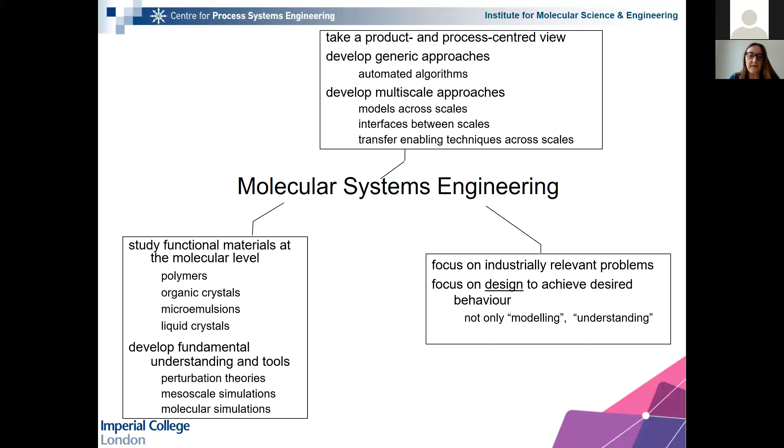So we want to go beyond understanding them and beyond modeling them to actually designing them and operating them better. And hopefully these themes will come through the talk.

So what I'm hoping to do this afternoon is to, first of all, convince you that we need to look at the molecular scale even when we're designing manufacturing processes. And Leah mentioned that this series is in the context of our work on greener plastics and generally more sustainable materials.

What I will be talking about here is the processes through which we make different materials. I won't be focusing specifically on plastics because that's a problem we haven't addressed yet, but the techniques that we've been developing for other manufacturing contexts...

For example, pharmaceuticals, should be applicable to plastics, and that's what we're hoping to find out through this new activity in greener plastics.

So one of the key tools that I will be using is computer-aided molecular and process design. That's quite a mouthful, so I'll use CAMPD for short. And I will first show you a property prediction platform which we have developed that helps us to connect to the molecular scale in a predictive way.

And then I will show you some examples of these different integrated molecular and process design problems, just to try and illustrate both some of the benefits of taking an integrated approach, as well as some of the research challenges.

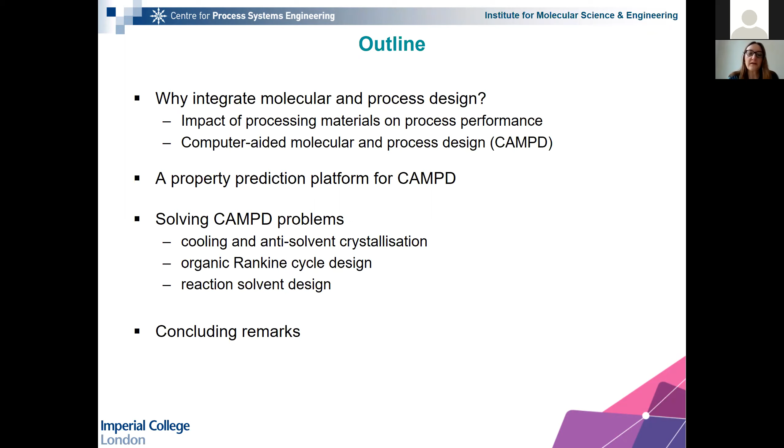And we look at a number of different things. So we look at crystallization, we look at waste heat recovery through organic Rankine cycles, and we look at solving or making reactions better through solvent design, and then end with some conclusions.

So why is it important to integrate the details of the molecular scale with the much larger scale of a process like a distillation column or reactor and so on? You have to remember that when we develop a manufacturing process, what we're trying to do is to make a particular product of a certain quality.

And we're trying to do that while doing it safely, while minimizing the environmental impact of that manufacturing process, and also while minimizing the cost of manufacturing, which comes both from our capital investment cost as well as our operating costs, so things like energy costs, for example.

And of course, energy - if we can reduce the amount of energy we're using, that has both environmental benefits as well as economic benefits. So let me try and explain in the context of solvents, which is an area we've worked a lot on, why this is important.

So you use solvents in many ways in manufacturing processes, and you use them, for example, for crystallization, so to separate your valuable product from the rest of what comes out of the reactor and obtain a nice pure crystal.

So paracetamol, for example, is a product that you consume in crystalline form.

And you might dissolve paracetamol in acetone, which is pure acetone here. It's fairly soluble in acetone, or in water, and it's hardly soluble in water.

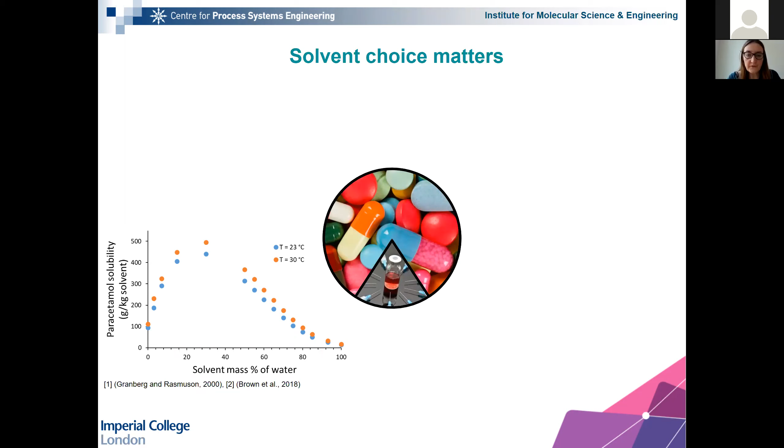Solvents are used widely in making pharmaceuticals, and so that comes with a lot of implications. The choice of solvent, of course, impacts the process performance, but it also impacts the way that your crystal looks. For example, you can get needles in certain solvents, and those can then be difficult to process further and to turn into the product that you really want. So that can be a limitation.

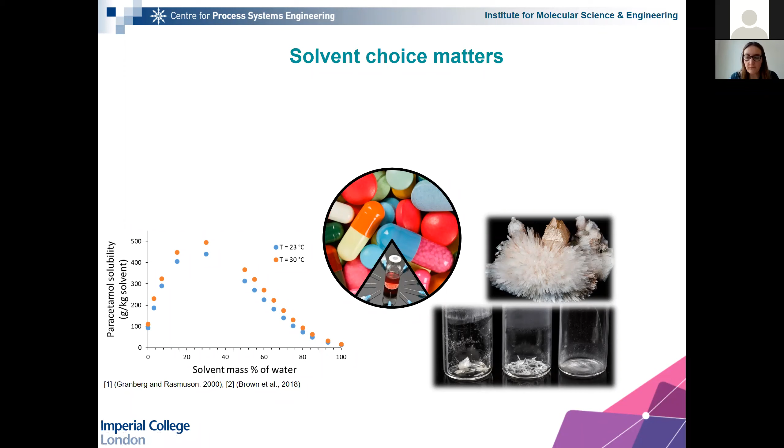And of course, solvents can pose safety risks. In the pharmaceutical industry, solvents have been found to be responsible for 50% of greenhouse gas emissions in the industry, through the cost of solvent recovery, for example, and solvent disposal. So it's really a major environmental impact. And as I've said, they impact on equipment, impact on other properties like the viscosity, and therefore how easy or difficult it is to get your fluids around the process.

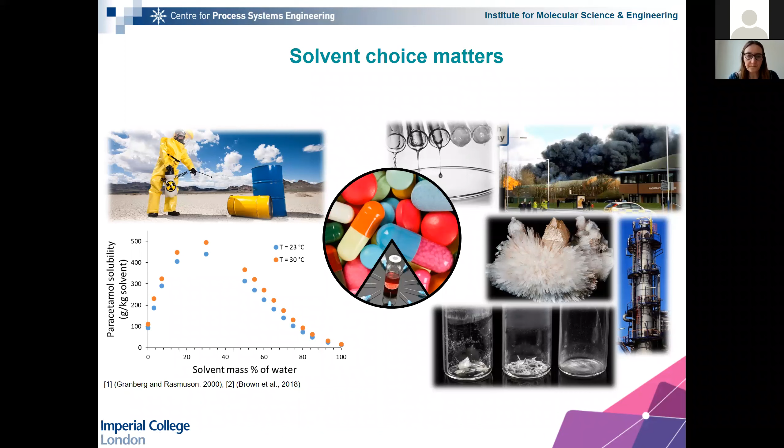So choosing a solvent, you need to address all of these aspects to find the best solvent for your process. There is no such thing as a good solvent on its own - it depends on how you're using it in context. So how might you go about this? Well, one fairly obvious way is to try and look at the properties of the solvent and to try and identify the properties that really matter for the performance, because that's reasonably intuitive and you can derive this from physical insight.

So if I look at the example I've got here, which is carbon dioxide capture by chemisorption, I'm looking for a solvent that is going to be absorbing carbon dioxide preferentially, so it's going to have a high affinity for carbon dioxide, so I can absorb it from a stream, for example, of natural gas, or perhaps a flue gas from a power station. That's really important, but I also need to then be able to separate the CO2 from the solvent. When I want high affinity, I also want the separation to be easy and to have low energy. So there's a big trade-off here.

And I can see that the properties that matter for this include things like the molar volume, the vapor pressure, the heat capacity. So what I've done here is I've got a number of putative solvents - these are just code names for these possible solvents. And I'm comparing them to monoethanolamine, which is a standard solvent for CO2 capture. When you see a red bar, it means the solvent is worse than monoethanolamine, and if you see a blue bar, then it is better than monoethanolamine.

So for example, surface tension here, when the solvent is better, it means that I may need a smaller column to effect the separation, which is good, less capital cost. On the right here, I've got other metrics, and these are environmental, health and safety metrics. You can see all of these solvents do better than monoethanolamine from this perspective - this is the cumulative energy demand, this is the global warming potential, you see mixed performance, and this is an eco indicator. So you can see that it's not very clear, the picture that emerges from looking at the properties.

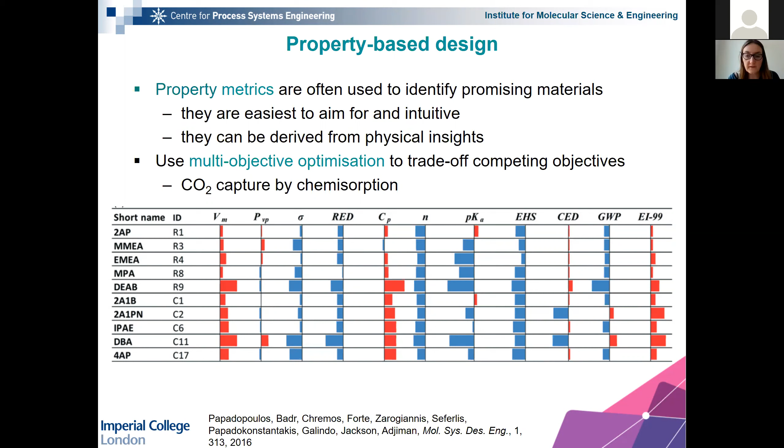And the reason that is, is because the properties are not the end of the story. They don't really tell me about overall process performance. I don't know from these whether I'm going to need a very large distillation column or I'm going to have very high energy demand and so on. I need to be able to quantify this, and I can only quantify this if I move to a process model and I really look at the use of the solvent beyond the properties in the process. So this is where the role of integration comes in.

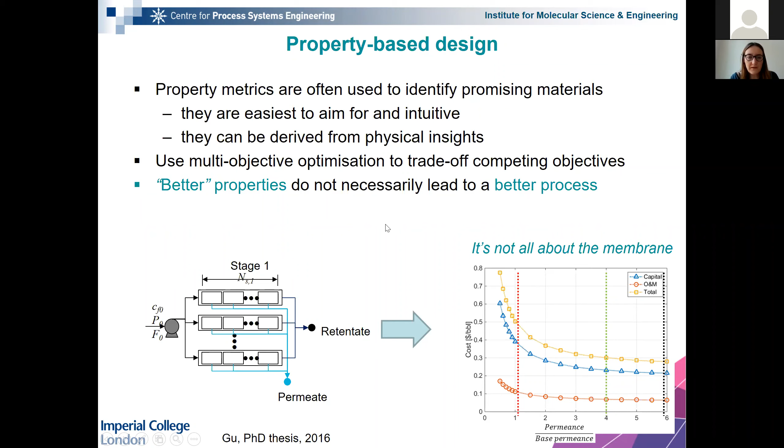There are other bottlenecks in the process that can then help you reduce the cost. So you might look, for example, at the details of the fluid flow over the membrane to remove the concentration gradients that are causing the performance not to improve so much here. So yes, up to a point we should improve the properties, but at some point it's wasted effort, essentially. We really need to look at the whole process to understand when properties matter.

So what we want to do is develop tools that help us make molecular level decisions an integral part of process synthesis and design. And there are a number of research challenges if we want to do this. This is my summary of what those are.

First of all, you need to have meaningful metrics that you can quantify. As I've said, properties are useful up to a point only, and we often need to try and find something more meaningful than that.

You need to deal with the complexity of looking for molecules that are going to work in your process. For example, if you find a solvent which happens to be actually a gas at the process conditions, then that's not going to work as a solvent at all. Or indeed, if it's a solid, it's not going to work as a solvent. So you need methods that are adaptive enough to recognize what will work and what will not work, and this is quite challenging from a numerical and algorithmic perspective.

You need to have prediction methods, property prediction methods, that help you assess how well a given molecule works for a given purpose. We need tools that are accurate enough and fast enough, efficient enough, to be used in the context of this integrated design. That is a challenge, to make sure we can predict all of the properties we need. Often we don't have everything we need.

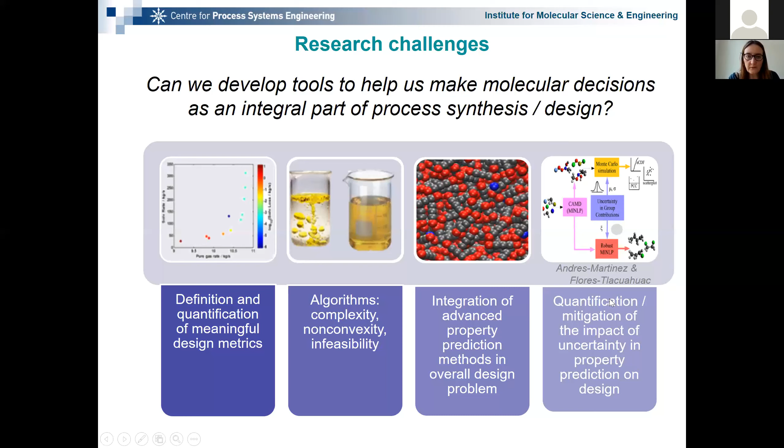Okay, so I'm going to show you a few equations here, really to give you a flavor for how we tackle these problems and how we translate what I've been talking about into a mathematical formulation, an optimization problem which is a mixed integer nonlinear problem. That's a standard kind of class of problems. So we have a bunch of equations and variables, and I'm just going to highlight the physical meaning of these.

So we have an objective function, which can be just one function or several functions. For example, it could be minimizing the total cost, it could be minimizing the environmental impact, it could be minimizing energy consumption, and we can have several of those.

We have some equations which capture our understanding of a physical system—process and property models. What happens if I make the temperature larger? What happens if I make the pressure lower? What happens if I change the solvent? How much will be our product flow rate? What will be the quality, the purity of the product, and so on? These are the equations that capture this understanding.

We have some inequality constraints, which are design constraints. They're, for example, the purity of the product, the maximum temperature that we want to use in the reactor, constraints that make sure our solvent is liquid at the operating conditions, so a bound on the melting point, or for example, on the viscosity of the solvent.

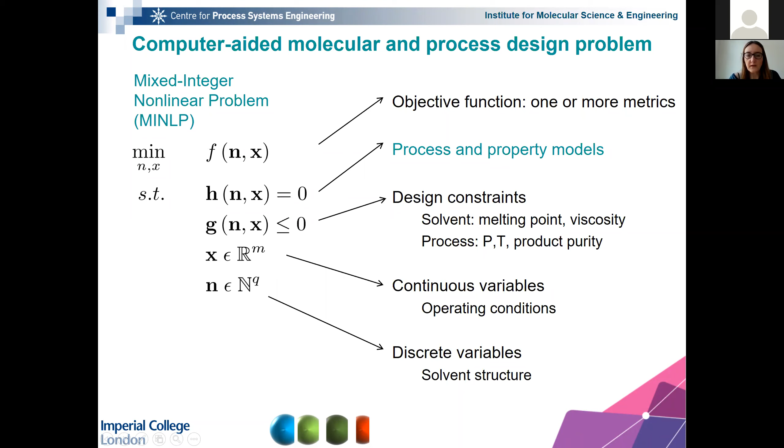So a couple of key messages when we talk about the property prediction platform. Our aim here is to predict the thermodynamics of mixtures and compounds for which no data have been measured, so that we can really innovate in terms of manufacturing processes and do better than what has been done traditionally.

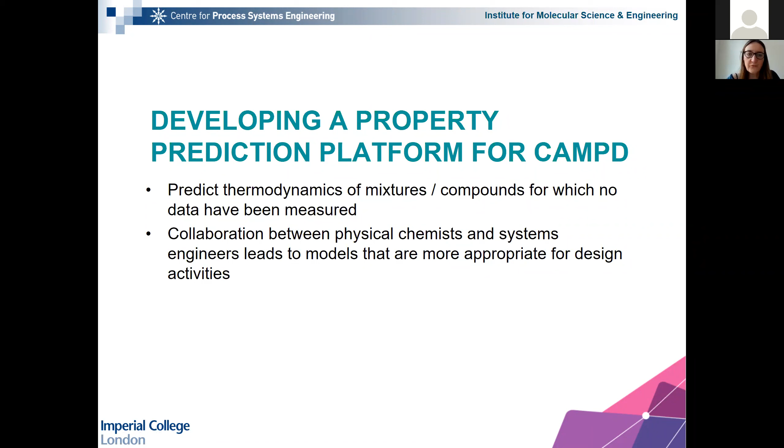The other key point is that achieving the kinds of predictive models that are useful for process and molecular design is not possible without collaboration between physical chemists who really understand the details of molecular interactions and engineers who understand why we need those models and what we need to do with them. That helps us focus on which properties are important and what kind of transferability we have. This is really one of the fundamental aspects of what IMSE as an institute is about, facilitating those collaborations so that we can have better tools to help us improve chemical and molecular systems.

So the model that we've been developing is an equation of state to predict thermodynamics of fluids. Its name is the SAFT VR square well equation of state, which was developed in the 90s to model systems such as polymers, where you can go from something like ethane all the way to polyethylene within the same framework, really taking into account the impact of that molecular aspect ratio.

The other thing is this equation of state is very good when you have a hydrogen bonding system, so you can add little sticky sites here and there to mean hydrogen bonding. It has the ability to model these kinds of behaviors well, while being essentially an analytical equation of state, so extremely fast to evaluate. That's very important if we want to evaluate many possibilities and different molecules.

What we've done through our collaboration is to make this approach more predictive. Initially, it was applicable to a single molecule or a family of molecules, a homologous series like the alkanes, for example. We've made it more predictive by breaking down those spheres into spheres that correspond to atom groups. So here I'm just saying CH3 and CH2, but you can have OH, COH, and so on and so forth. And we also went and tweaked the details of the theory.

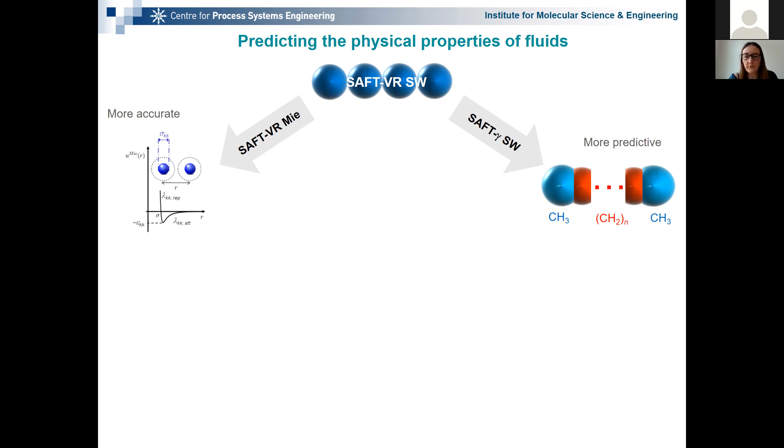Heat capacity is extremely important when you're doing process design, because this is what determines your energy cost. With the phase equilibria, you can know how much of the product you're getting, or how good your separation is, and what is the purity of your streams. And with the caloric properties, you can figure out your energy requirements. That combination is what enables you to do integrated design.

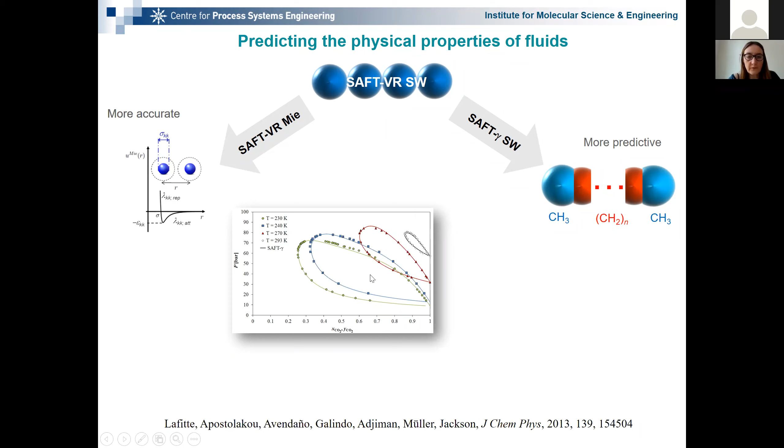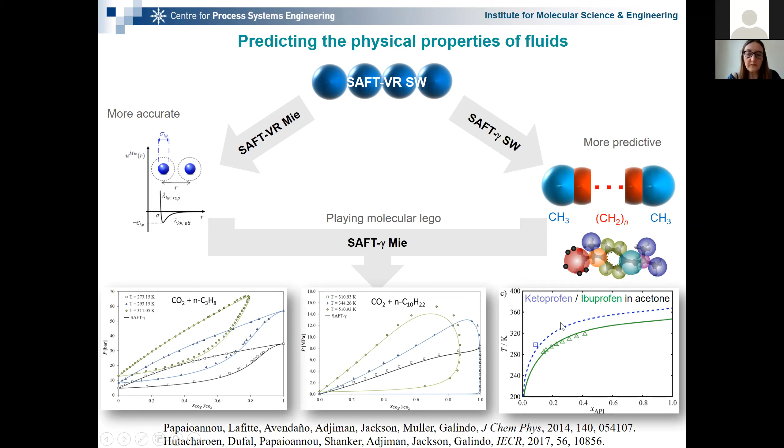You can use the same approach with a slightly larger number of groups to predict things like the solubility of ketoprofen or ibuprofen, shown here, in acetone or different solvents. So you're going from vapor-liquid equilibrium to solid-liquid equilibrium with completely different types of compounds, without using any of the solubility data. Over the years, we've been developing a matrix of group-group interactions - for example, CH2 with CH3 - and you have many different parameters that we can use to play this molecular Lego and predict the behavior of mixtures under different conditions of temperature, pressure, and composition.

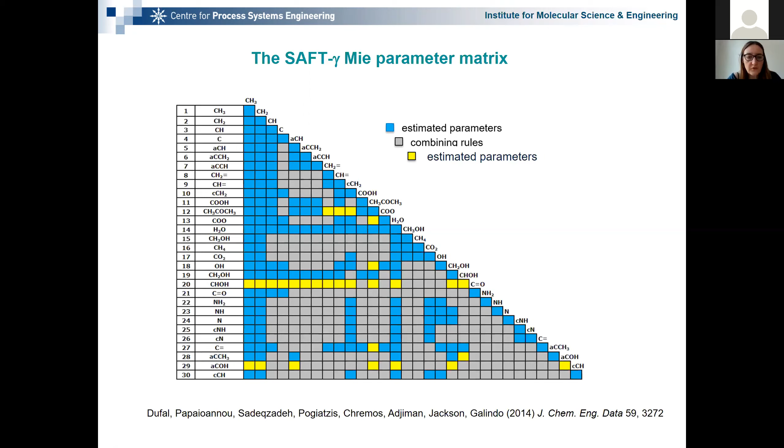So let me now show you how we can use this equation of state for computer-aided molecular and process design. I'm going to start by looking at the design of crystallization solvents. The key message from this application is that we have strong interactions between the solvent and process variables. This is what I was telling you at the beginning, and why we need to treat the problem in an integrated fashion - this will really illustrate this point.

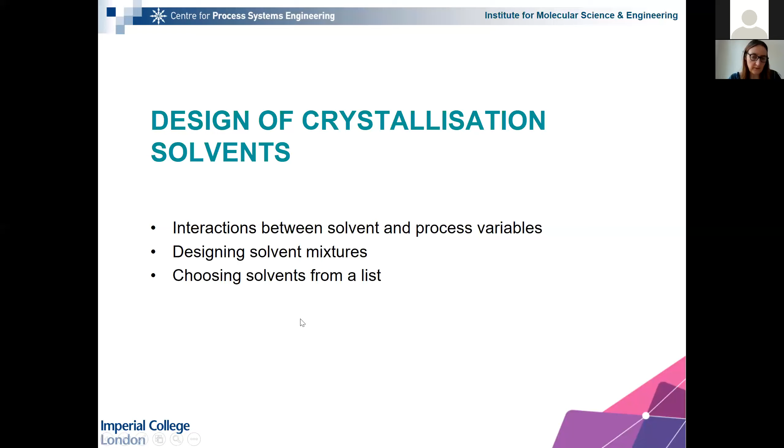We're going to be designing mixtures of solvents, which makes the space of possibilities much bigger, because we have to determine the composition of that solvent. We are not going to be creating new molecules here - we're just going to use solvents from a predefined list. I will come to the creation of new molecules a bit later.

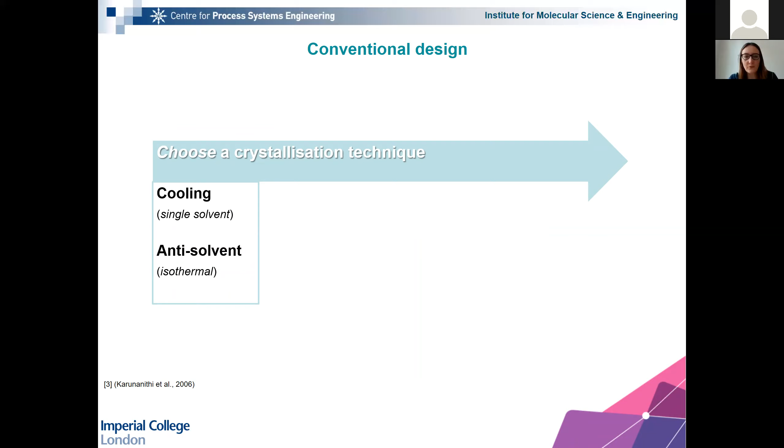So conventionally, how would you choose a solvent for a crystallization process? You would choose a crystallization technique - you might say, I'm going to run a cooling crystallization. So I have the product I want to crystallize dissolved in some solvent, and I'm going to drop the temperature and it will crystallize out. Something you know, for example, if you have a lot of sugar dissolved in a solution, and if you let it cool, some of it will crystallize out.

Or you might say, I'm going to use an anti-solvent crystallization. I'm going to keep the temperature constant, but add another component, an anti-solvent, to the mixture, to the crystallizer, and this will force my compound to drop out and crystallize.

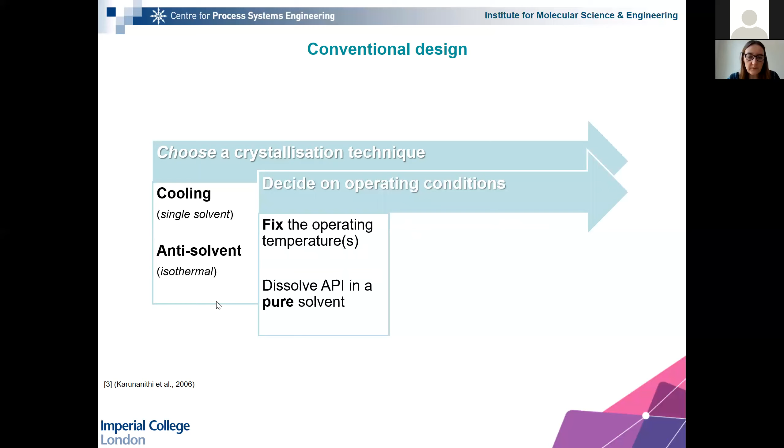Having done this, you would then decide on the operating conditions, so the operating temperature, and you would then dissolve your active pharmaceutical ingredient, the API, in a pure solvent. And then you would choose which pure solvent you have, doing things like finding a solvent or an anti-solvent by trying to optimize key performance indicators, for example the crystal yield or the solvent you use.

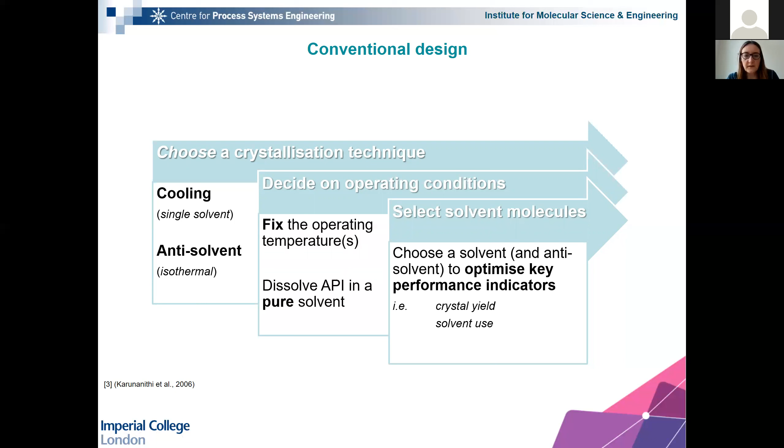So how much of the API you have in your solvent initially are you able to crystallize out? Because there will be some residual left in the solvent. And you might want, from an environmental and cost perspective, to minimize the amount of solvent that you use. Now, by doing this one decision at a time, you may find that you don't have a very high-performing process, and that you are limited in what crystal yield and solvent use you can achieve.

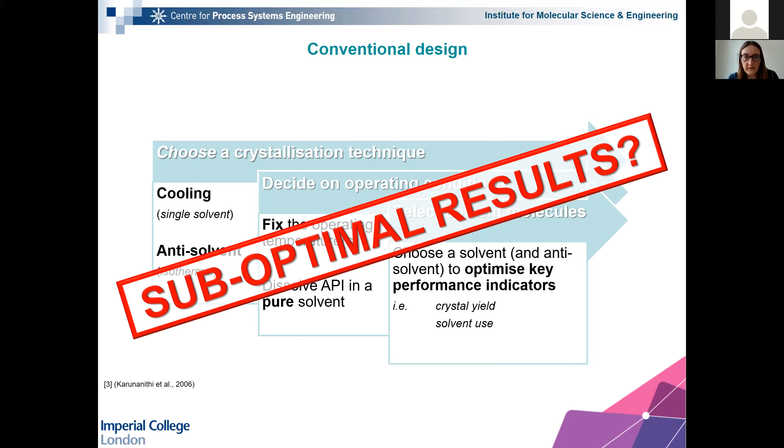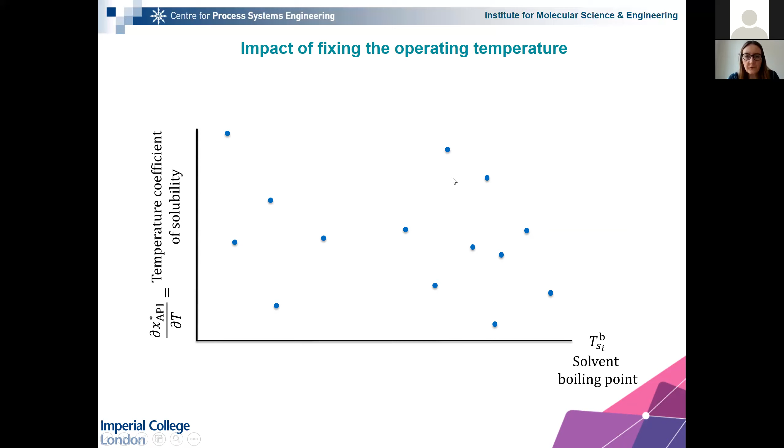So this quantity is plotted as a function of the solvent boiling point. These are different solvents, each dot is a different solvent, and you can see there isn't much correlation between the boiling point and this temperature coefficient. But if we fix the operating temperature, for example here, we're going to have a range of points that are not going to work for our process, and some points that are indeed feasible.

The solvent with the largest temperature coefficient, which is what we want for good crystallization, is this solvent here. But we won't be able to access this solvent or that one, so we have a missed opportunity because we've fixed the temperature. If we allow the temperature to vary, we open up the field of possibilities and can find our truly best operating temperature, which is the higher temperature here.

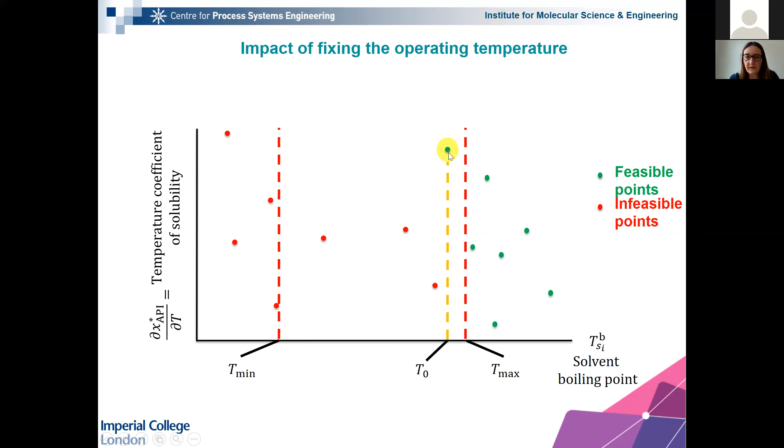So we do want to allow variation of the process conditions together with the solvent choices, the molecular decisions and the process decisions. We want to make several decisions simultaneously: at what temperature should we operate, which solvent molecule should we use, and what is the composition of the solvent? We've been developing a methodology to do this.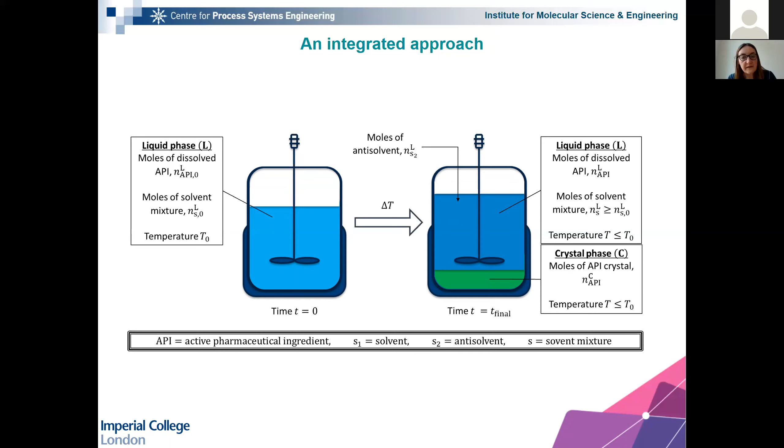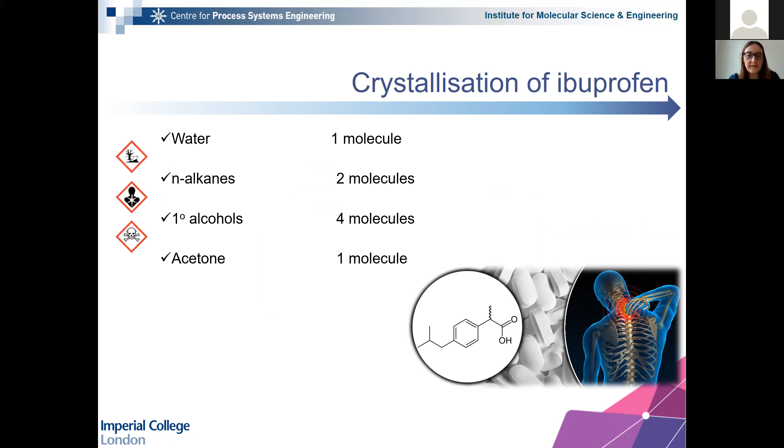Let me show you an example of this on the crystallization of ibuprofen, a well-known painkiller. We're using a small list of solvents: water, two different n-alkanes, four different alcohols, and acetone as our potential solvents. We're allowing binary mixtures of solvents, which gives us 28 possible combinations—a relatively small space to work with.

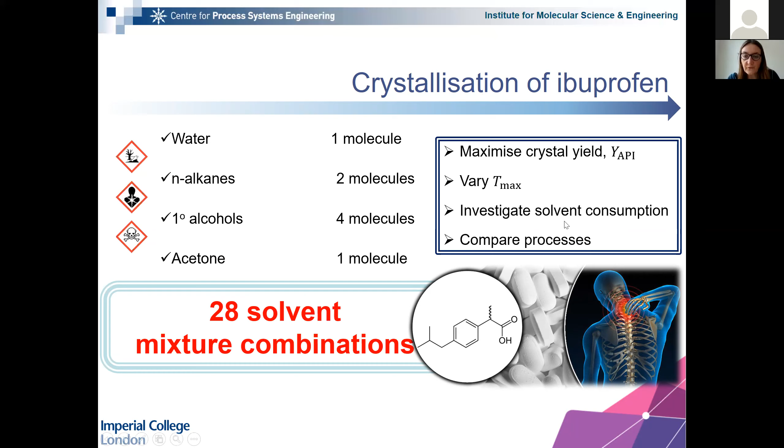We're trying to maximize the crystal yield in this case, allowing the maximum temperature at which we can start the crystallization to vary. We also want to look at solvent consumption, though that's not an objective here—we're just looking at how it evolves.

So here are some results. I'm showing on the left the crystal yield as a function of the initial temperature. If I fix the maximum temperature at 290, meaning I cannot have cooling—just anti-solvent crystallization—I end up with a mixture of acetone and water as my solvent, with quite a high yield. As I allow the initial temperature to increase, I can increase my yield quite a lot. If I go beyond this value, there's a switch in the optimal solvent mixture.

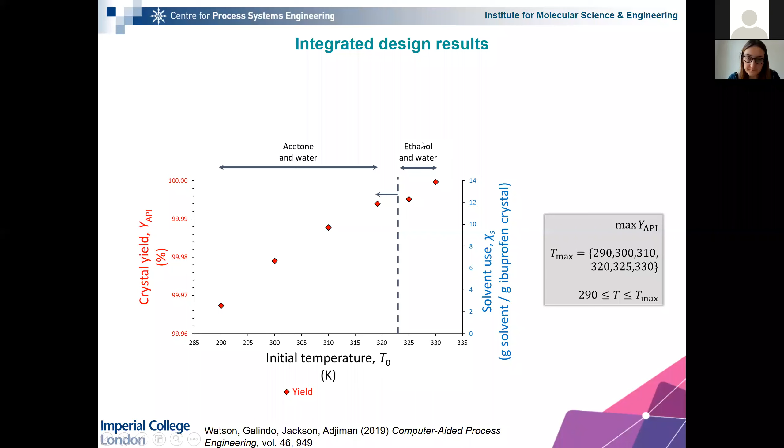So you can see the benefits of looking at molecular decisions and process decisions simultaneously. Out of this, I'm also getting the specific composition of the solvent—each of those diamonds corresponds to a different mixture of acetone and water.

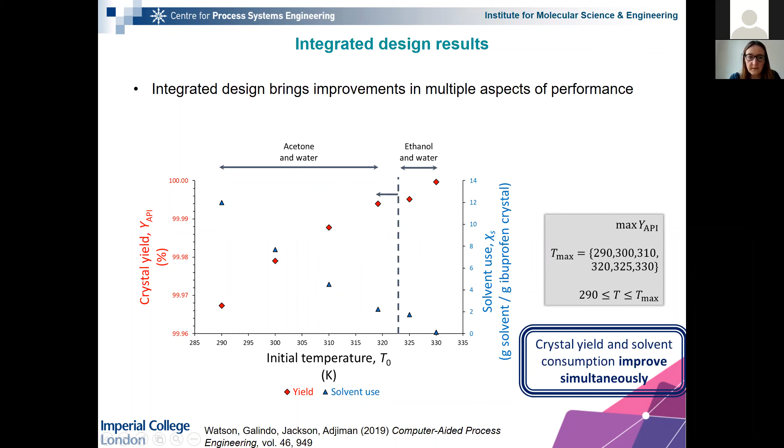So I'm looking at the components themselves and their proportions. Okay, so we illustrated a few of this example. I now want to move to a different example to look at some other aspects of computer-aided molecular and process design and how that can help to design better processes.

So I'm going to look at organic Rankine cycle fluids and the cycle itself. We're going to now explore a vast space of fluids. From the 28 possibilities we had before, we're going to be looking at 58,000, so rather a big increase in scope. And so the algorithms we use here become even more important. I'll touch very briefly on this, and I'll talk about choosing performance metrics as well.

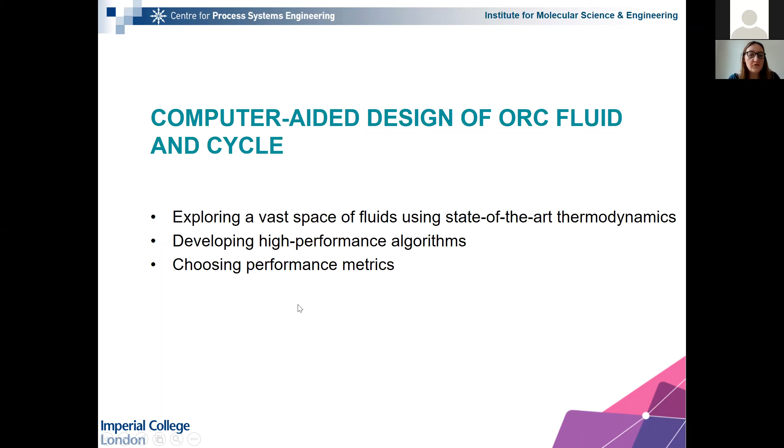So an organic Rankine cycle is a device through which we can recover low-grade heat. We have a waste heat stream, which is typically at a fairly low temperature, but which we'd still like to extract value from. So what we're going to do is add a bit of work to the system, and we want to recover additional work by recovering the energy in the waste heat stream. For this, we need a cycle, and we need a fluid to go around that cycle.

So we take this fluid from a liquid at a fairly low temperature. This is the temperature entropy diagram here, so we're somewhere down here. We're going to increase its pressure via a pump with the added work that we put in. We're then going to put this fluid in contact with our waste heat stream, and that's going to evaporate the fluid. Then we're going to recover the energy that the fluid has gained through a turbine, and that will give us the work output that we're looking for.

Okay, so we're trying to add as little work here as possible to recover as much work as we can, extracting heat from our fluid here. We're then going to take our vapor stream, that is now at a lower pressure, and we're going to put it in contact with a cold stream. And we're going to condense it back so it can go back around the cycle.

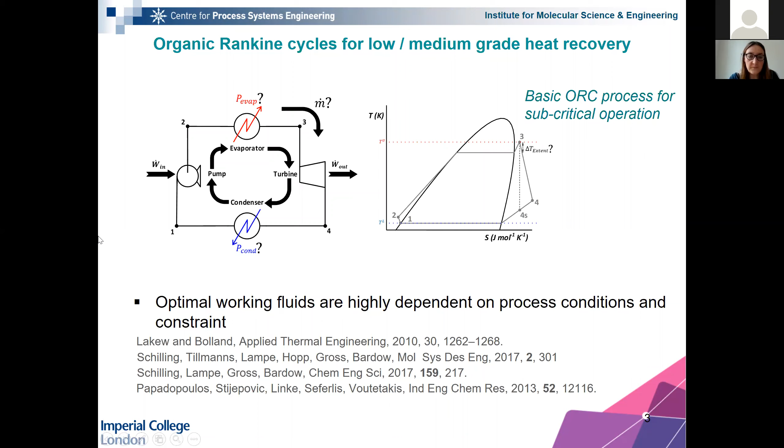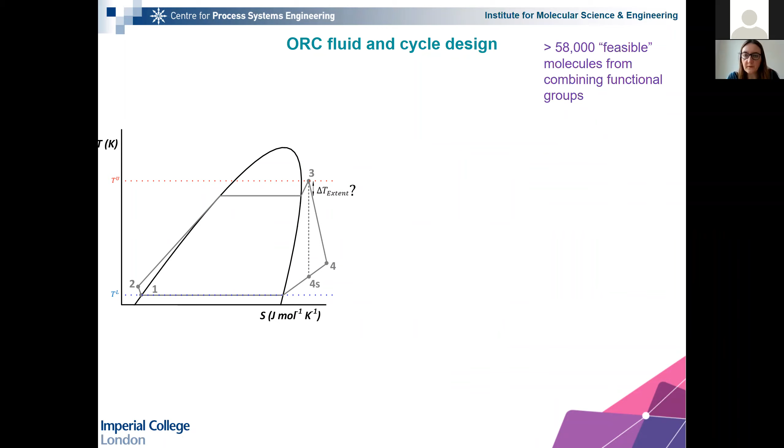So as you can imagine, the performance of the system is very much dependent on the properties of the fluid itself. So we're going to take a system of 58,000 possible molecules, and we're going to try and develop this from the functional groups, so the atom groups that I was mentioning before.

So we have here, for example, for a given cycle, we have the different temperatures. We have the lowest temperature at which we can operate, and we have here the medium or the highest temperature of our waste heat stream. And so we have to operate within this window here.

So if you look at different molecules from the set of 58,000 molecules, you can see that of these three, ethene, butane, and octane, only butane crosses the operating window. And this will depend very much on the system, the particular waste heat stream that we have at our disposal. So within the 58,000 molecules, which ones are feasible or infeasible will depend on the context.

So it turns out that over 99.5% of the molecules do not have the right properties. So actually, many of these 58,000 are wasted effort. But the set depends on the problem, so it changes all the time. So we can't reduce it a priori.

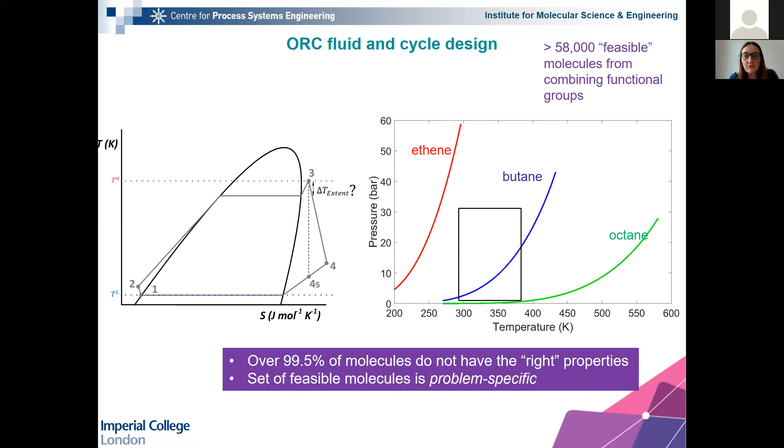So we're going to use an MINLP framework to address this problem. I don't want to go into a lot of detail here, I'd be happy to answer questions about this. But what I want to say is that, compared to a traditional algorithm, we've added a few tests and modifications to enable those molecules to be screened, to enable the infeasible molecules to be eliminated, and for the algorithm to succeed.

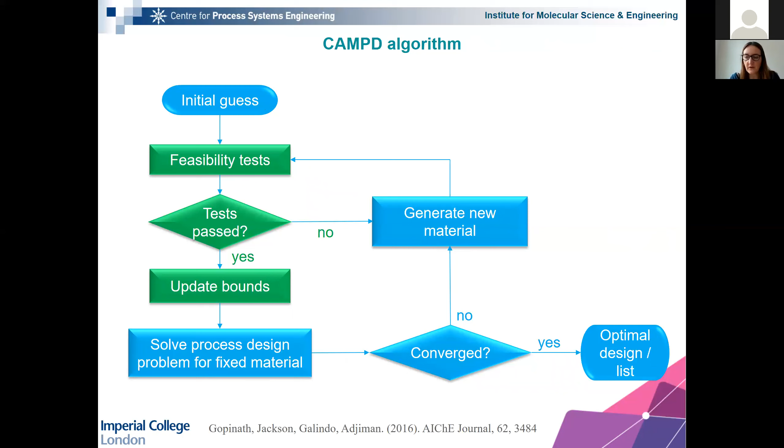And then the other thing to point out here, which I mentioned earlier, is that we are going to try different materials, but we're not going to try all 58,000 molecules. And that's really important because it really cuts down the cost. So let me show you some examples.

So we're using the equation of state that I showed you earlier, and we're using the MINLP framework. And here are a few case studies. So we're looking here at 3 different case studies where we have different waste heat streams. You can see our upper temperatures are different in all 3 cases, and the lower temperatures also vary.

You can see here that we have quite a wide range of temperatures, but in case study 3, we have a very narrow range of temperatures. And that is going to have an impact on what is feasible or not.

Finally, in this case here, we're looking at maximizing the net power output from the system. And in this case here, where we have solar collectors, we're looking at maximizing thermal efficiency as our objective. So, two different perspectives on these problems.

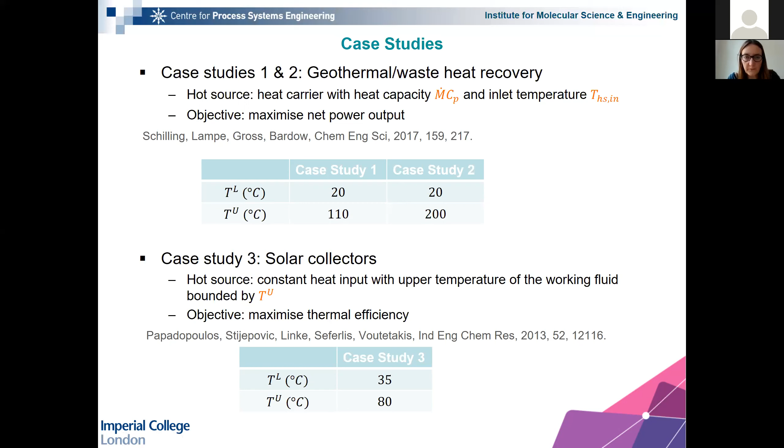So if we look at the space of feasible candidates for the three case studies, out of the nearly 59,000, you can see we have different numbers of feasible molecules. Case study 2, which has the widest temperature range, has 263. But case study 3, which has the narrowest range, has only 26.

The other thing you can see is if you look at performance versus the rank of a molecule in each of the cases, you can see different behavior. So in cases 1 and 2, where we're trying to maximize the net power output, we can see that really drops dramatically quite quickly from molecule to molecule. Okay, so these are all feasible molecules. In case study 3, the first 10 molecules also give us similar performance, and then we have a big drop in performance for the other molecules.

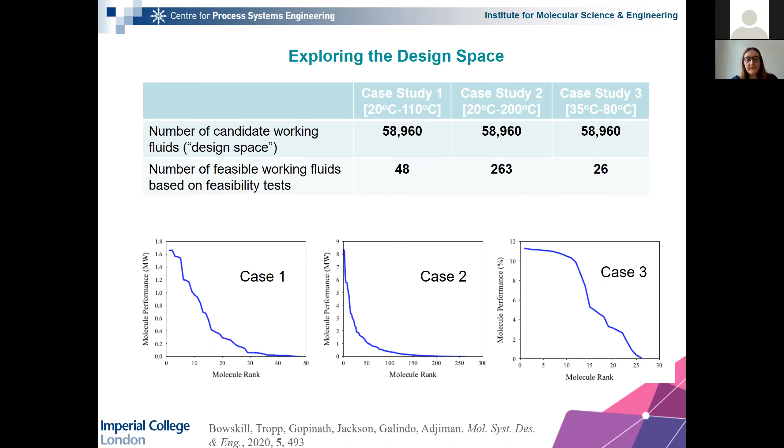The other interesting thing we learn with these case studies, in particular with case study 3 - these are the top 10 molecules here that we found - is that if you look at the properties of those molecules, you will see in the literature many examples where people say you need to find a molecule with low heat capacity, a specific molecular weight, or different behavior in terms of the critical pressure. Actually, the performance of the process from a thermal efficiency perspective is not so clearly related to these properties. So you really need to look at the process and not just at the properties.

And this is shown in this graph here. This shows you the deviation from average for the 26 feasible molecules of different properties - density, heat of vaporization, and so on. Each dot here represents a feasible molecule. The red ones are the top 10, so they're the really good performing ones, and the solid one is the top molecule. You can see that, for example, on the heat of vaporization, yes, they're all less than average, but actually the best one is pretty average in its behavior here. And there's a little blue dot you can maybe see here, which has the lowest latent heat of vaporization, but doesn't perform so well - it's not a high performer. So actually the solid one, the best one, is not exceptional in any way in its properties. It's pretty average. And that really tells us we need to distinguish between properties and molecules and processes.

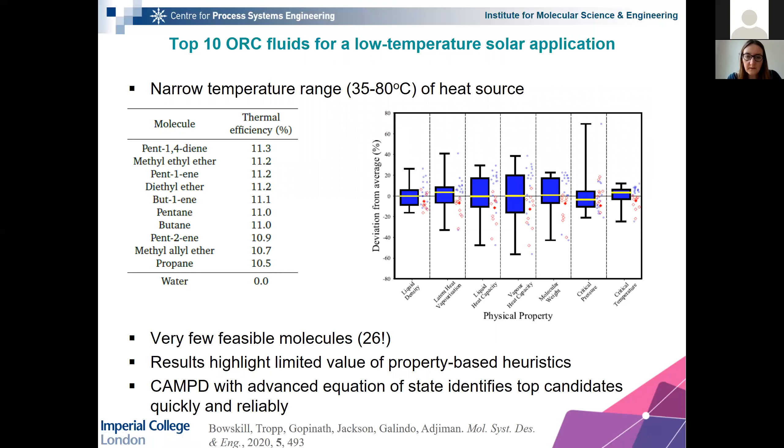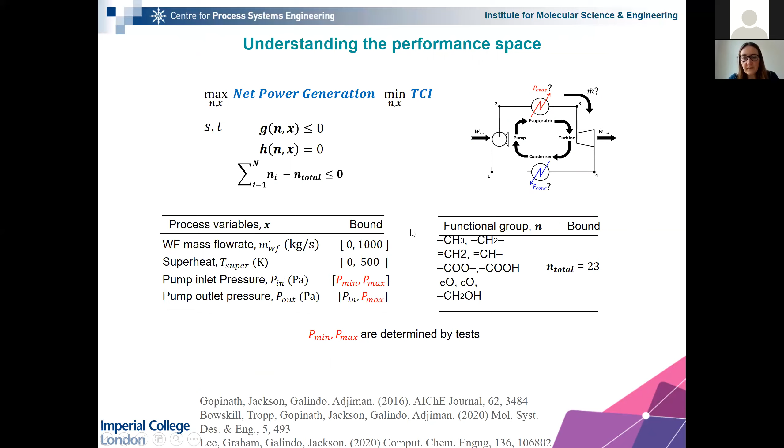The next thing I want to say about this type of ORC systems is that you can start looking at different objective functions. So if we look at net power generation as well as the total cost of investment - these are the details of the design, the groups we use to make our molecules - you can start developing algorithms that can solve this problem, where you're trying to be in this corner: the inverse of net power generation, and the cost. So you want minimum cost and maximum power generation - you want to be here.

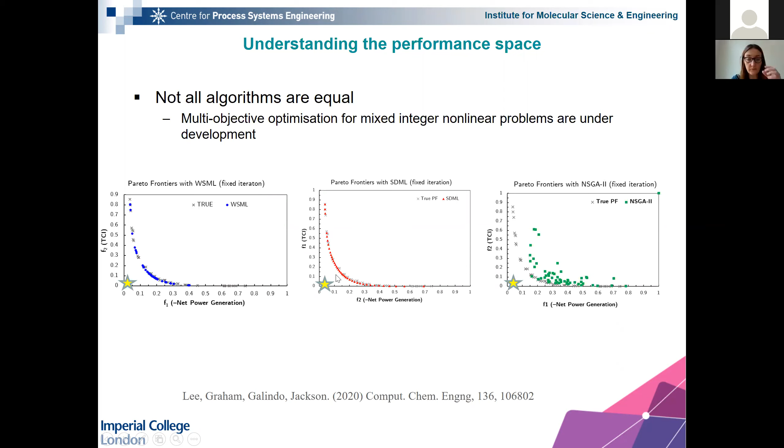And this shows you what you can achieve here. All those red dots, the diamonds, represent the best you can achieve. So we're developing algorithms that enable you to find these trade-off solutions, and then you can choose where you actually want to operate as a designer.

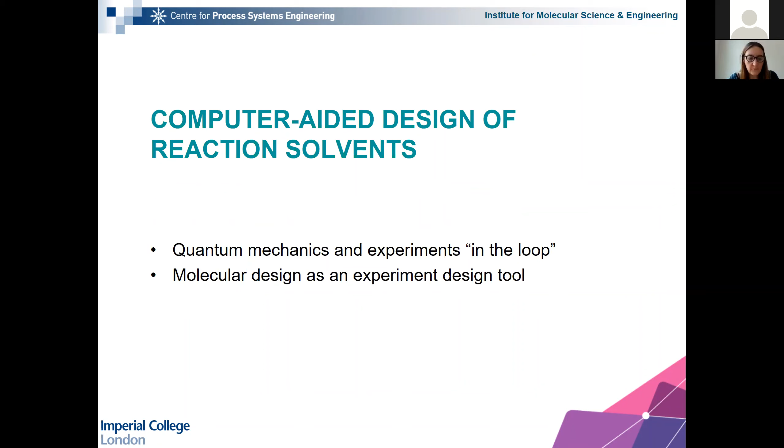Very briefly, I will conclude with an example where we're not using the equation of state because we're not able to predict the properties that we want with that equation of state, but we're using quantum mechanics or experiments in the design loop. Really what we're getting from molecular design is guidance for the experiments we should undertake.

And so we've been looking at this in the context of reaction solvents. Reactions are quite complex, and you can do many things to improve their performance. You can use different catalysts, change the operating conditions, change all sorts of things. But what is not always well understood is that the solvent, which is a neutral participant, not really a participant in the reaction, has a big impact on the kinetics of the reaction.

For example, what Menschutkin showed in the late 19th century is that you can have a radical effect of the solvent on the reaction rate. The Menschutkin reaction, this specific reaction here, is 20 times greater in acetonitrile than in toluene.

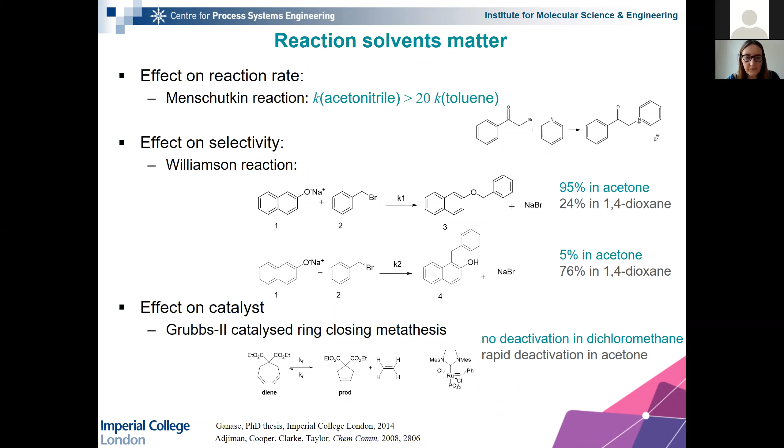Selectivity can change completely, say from acetone to 1,4-dioxane, for this Williamson ether synthesis reaction. And you can have completely different impacts on the catalyst—so you can have deactivation of a catalyst in acetone, but no deactivation whatsoever in dichloromethane. So the choice of solvent really matters, and it's quite complex to decide what is a good solvent for a reaction.

So to guide that process and decide which experiments to carry out, we've developed a methodology similar to what I've shown you before. We take a small number of initial solvents, which we build from our little molecular Lego here, and we then obtain the rate constant in specific solvents.

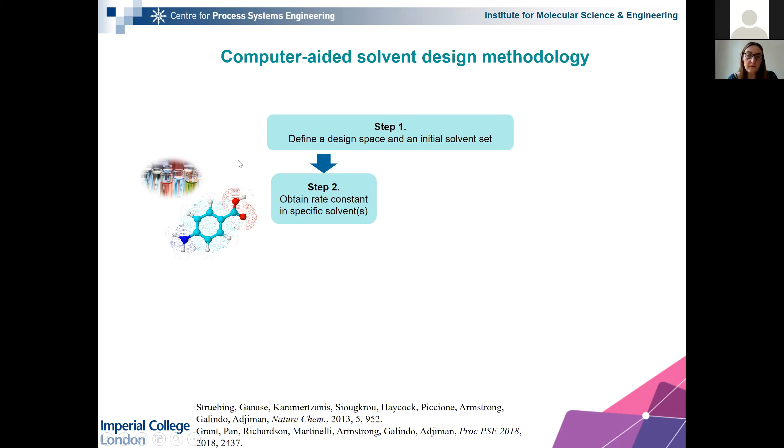We do that either through quantum mechanical calculations or through experiments, and we do that for just a very few solvents. Then we build a surrogate model from this small data set, and we use this model in the kind of optimization that I've been describing so far, and we design the best solvent.

If we find a new solvent, we go back to test that this was indeed a good solvent. We do the more accurate measurement or calculation, and we update our surrogate model. We go around this loop until we achieve convergence, and we can verify our final designs experimentally.

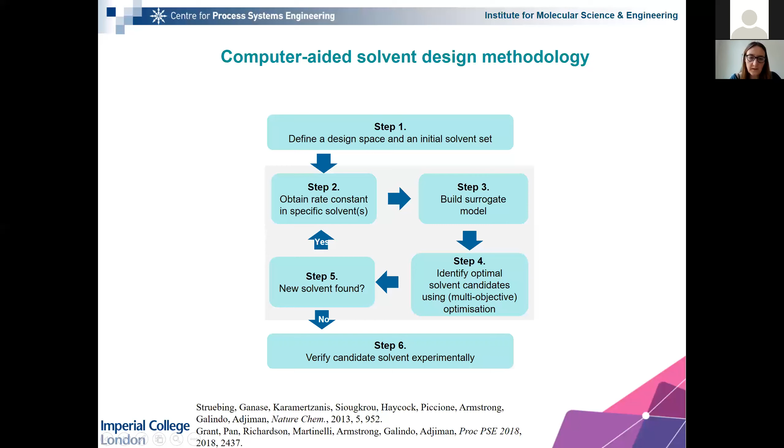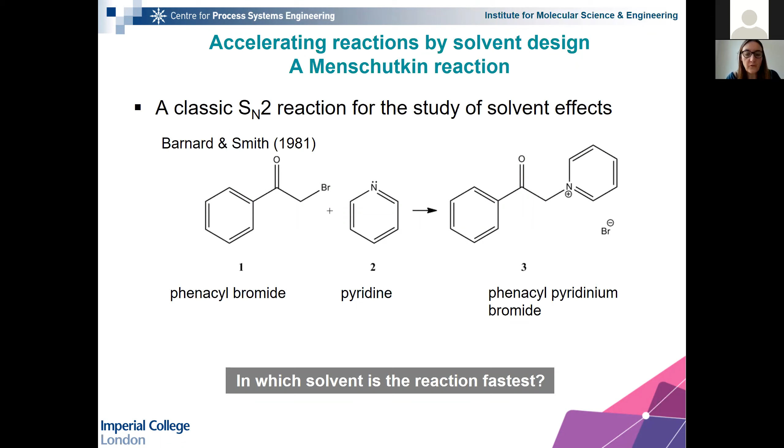So we've done this, for example, as a proof of concept for this Menschutkin reaction between phenacyl bromide and pyridine, just to find out in which solvent the reaction is fastest. We calculated here the rate constant by quantum mechanics. I don't want to go into the details of how we solve the problems, but we used a space of 40 functional groups.

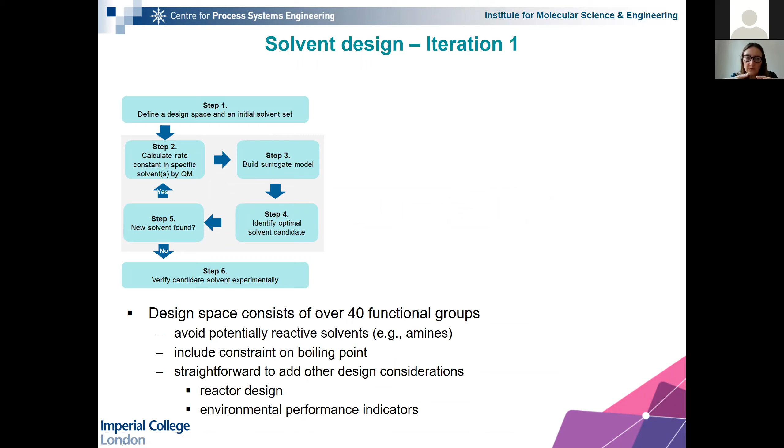That's about 1,300 potential molecules we can use as solvents. We started with a small set of solvents, but for which the rate constant varied by a couple of orders of magnitude, and then we set our optimization approach out on this. At the end of a few iterations, we found nitromethane as a potential solvent that did better than acetonitrile.

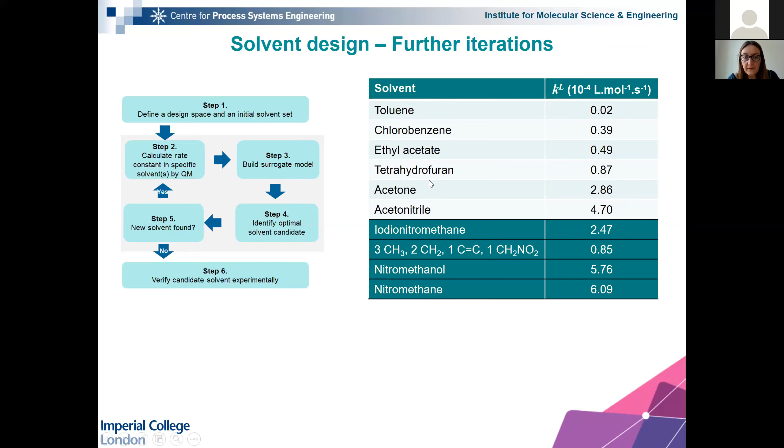Now if you know about this reaction, you'll know that you want to maximize the dielectric constant to maximize the reaction rate. But as it turns out, acetonitrile and nitromethane have pretty much exactly the same dielectric constant. So by going from this qualitative assessment to a more quantitative one, we were able to identify that nitromethane allows the reaction to go faster, and we did this by evaluating only about 10 solvents quantum mechanically, as opposed to the 1,300 potential solvents in our design space.

And just to mention also that we then carried out experiments in nitromethane and verified that indeed there is a 40% improvement in the reaction rate from acetonitrile to nitromethane.

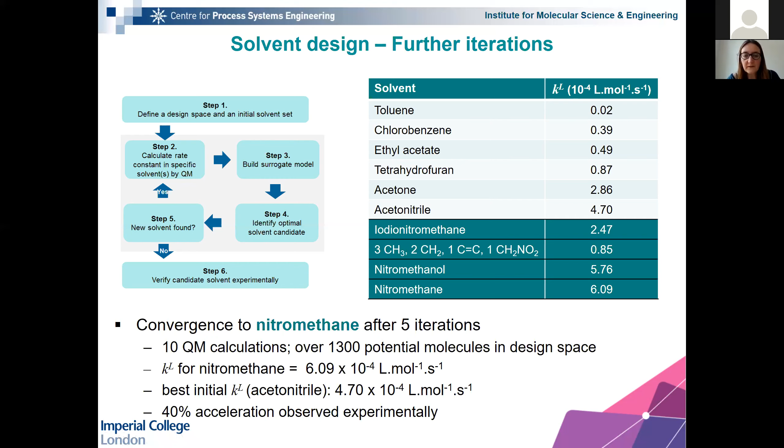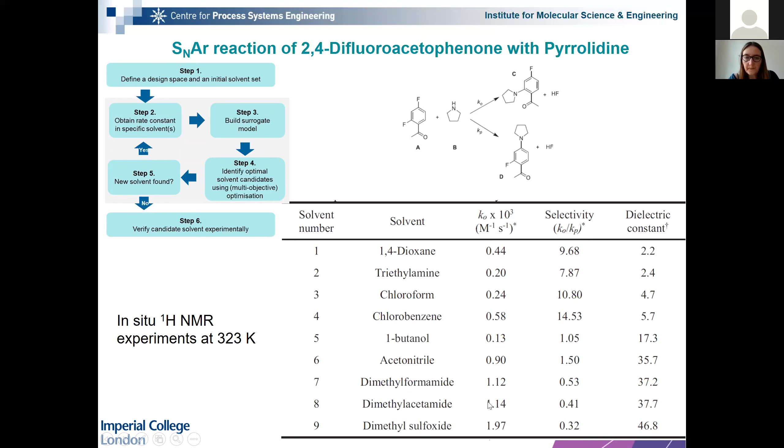And the very last example I want to show is where we've put experiments in the loop. We were looking at selectivity as well as rate constant for this SNAr reaction—looking at the rate of this step and the selectivity KO over KP. You can see that the selectivity is not related in any way to the dielectric constant, and there's also not so clear a trend with dielectric constant for the rate constant. So we developed this, and the nice thing about using optimization is that you can add other constraints.

So we put constraints on the toxicity of the solvent, on the octanol water partition, safety constraints, on the flash point. And so you can integrate these different considerations into your design.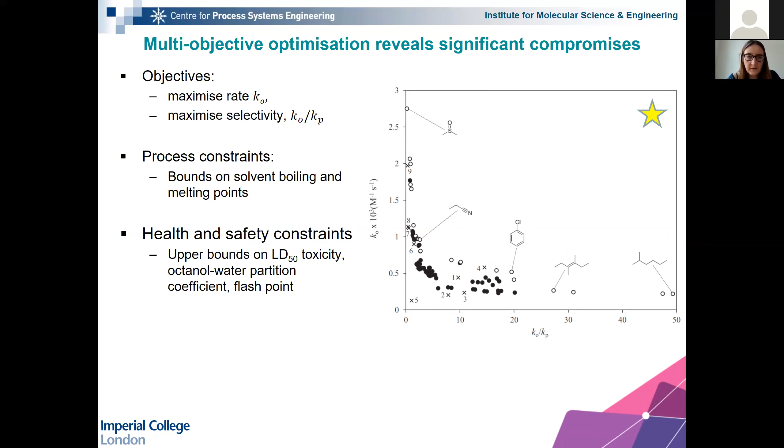So to conclude, what I've hopefully shown you this afternoon is that by integrating molecular and process decisions, we can improve process performance in multiple objectives, taking into account the environment and safety aspects. But to do that, we need predictive structure property models, and they need to be able to predict the right properties. For example, caloric properties were very important to be able to assess energetic costs.

But we also need to tailor algorithms to overcome a lot of the complexity of changing the molecules as well as the process conditions. And I've shown you a few examples like crystallization, heat recovery, reactions of how this in practice can actually work. And I very much hope that we can make this work for the manufacturing of plastics as well.

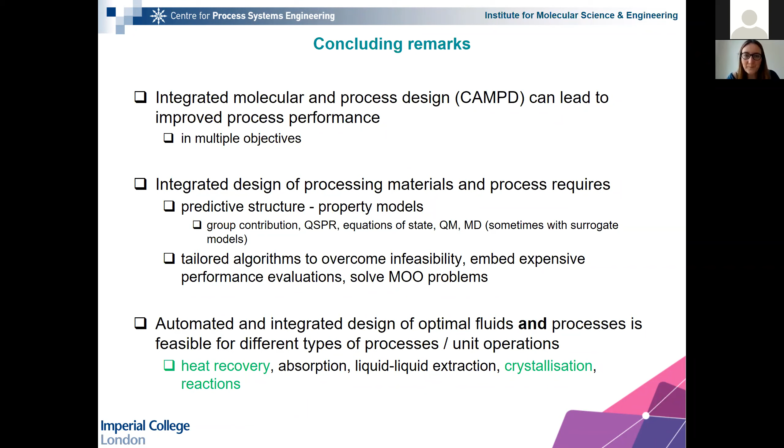I think there are some questions, so I'll start answering those now.

So the first question here is, how computationally viable is it to search for multi-component mixtures, so more than 2 components, for crystallization solvents or ORC fluids? And have I got any feel for whether much better solutions exist once you go beyond binary mixtures?

So for crystallization solvents, we have gone up to 4 or 5 components, and we've never found anything with more than 3 components being better. So nothing with 4 components, 5 components, and so on.

For ORC fluids, we have looked at up to binary mixtures, and you do get better performance with binary mixtures. So I think the main benefit comes from not necessarily an improvement in performance in, say, cost metric, because using mixtures can add a lot of complexity, but it can have a big impact on things like the environment. As more and more compounds are added to legislation and become illegal to use, mixtures become more and more important, because you can use molecules that are relatively innocuous in order to get the performance that you need.